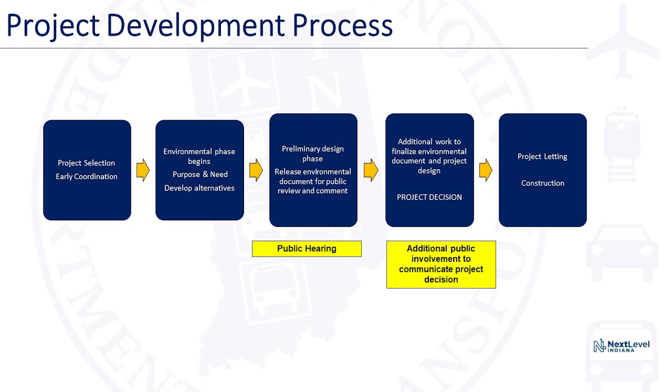This is our project development process, how it starts from the beginning. Project selection, we send out early coordination letters to stakeholders and environmental agencies. We do the environmental phase of the project, develop purpose and need and alternatives. In the preliminary design phase, the environmental document has been released for public involvement, and a hard copy of it is here tonight and also available on the INDOT website, and copies also at the Richmond Library and the Greenfield District office. So that's where we have the public hearing tonight.

Once that document has been released for public involvement, we have the hearing as we are tonight. After the hearing, we'll have 2 weeks for additional comments to come in. All those comments will be considered and evaluated. We'll roll them into the environmental document. That'll be the project decision process. And then that document will be approved by INDOT Central Office. The project will go to letting and construction.

The preferred alternative that was chosen for the project will include the construction of a new Welcome Center building with additional amenities. All this information, again, is in your handout packet that you received tonight. New lighting and decorative landscaping will be installed, and they'll have an additional restroom for the truck drivers so they don't have to go into the welcome facility main building if they don't want to.

And the sewer line connections will be tied into the town of Centerville. The reconfigured parking area will still provide the necessary and required parking spaces for trucks and passenger vehicles, as INDOT prefers as part of their comprehensive rest area truck parking plan.

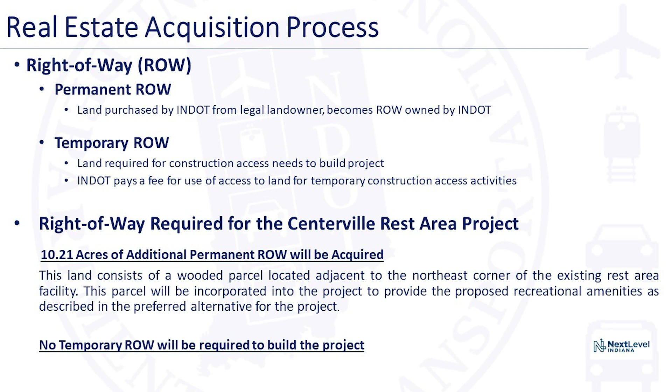Again, the right-of-way required for this project is 10.21 acres. It's the wooded parcel located adjacent to the northeast corner, and it will be incorporated into the project to provide the proposed recreational amenities as part of the project. No temporary right-of-way will be required.

The other alternative that was considered for the project was the do-nothing, no-build alternative. It's pretty straightforward as it sounds - it wouldn't require the expenditure of any state or federal funds, and there would be no environmental impacts. The alternative is feasible but not prudent because the existing conditions as described in the proposed purpose and need of the project would not be addressed. So it was determined that the do-nothing, no-build alternative would not meet the purpose and need of the project.

Can we go back to the existing layout? Okay, one more. Okay, so this is the layout of the existing rest area facility right now.

What you see is the existing ramp coming in, splitting the exit ramp from I-70 westbound, splitting the truck parking - trucks go into truck parking, cars go into the car parking area, and in the middle there's an existing building with no recreational amenities, just picnic tables on either side. All of the green hatched areas you see are existing ditches that basically become wetland.

Existing truck parking has 156 trucks being parked, and existing car parking is about 97 spaces, including 6 handicap spaces.

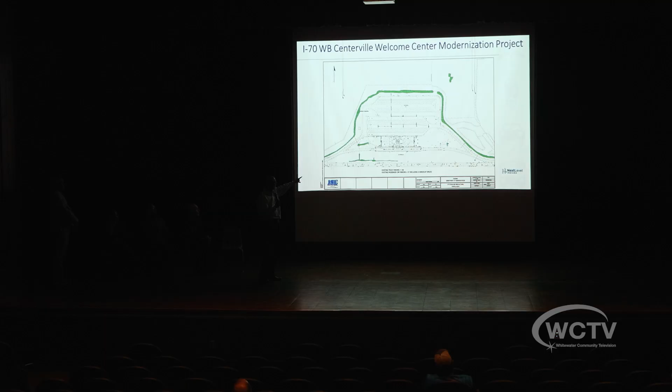What the existing parking does not provide for the truckers is that, if you look at it, at the farthest point the truckers have to walk all the way to the building to use any of the facilities there. Also, the existing layout requires truckers to go around the existing parking, go back in the back, and then turn around and come back again. Because the truckers cannot come all the way from the back - or you can't force people to - there are a lot of trash issues all around the rest area as well.

If we go to the proposed layout, next slide please. So what we're doing layout-wise: the existing ramp from I-70 at the exit remains the same, it just scooted further east.

The proposed ramp goes for the truckers, and it splits in between right here in the front. There's a new Welcome Center building with amenities that you will hear about in detail with the architects and landscaping discussions.

The car parking is right in front of the Welcome Center facility. Truck parking is in the back of the lot, which means they're not in conflict with any of the other traffic. We're using all of the existing pavement in the truck parking area.

As part of the overall project, you see the trail layout—the proposed recreational trail through the wooded areas. The only area being disturbed is a 10-foot wide trail, and the only trees being disturbed are for that trail at the existing ground elevation. There are no additional trees being removed other than for that construction, so the majority of existing trees would be maintained, providing a better recreational amenity through the woods.

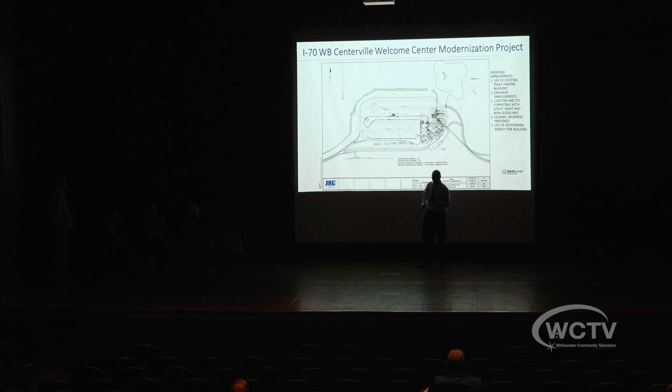As part of this project, we're also being creative and using geothermal energy for the building's heating, air conditioning, and electrical needs. The geothermal fields will be installed between the truck parking and car parking exit ramp, as well as between the car parking ramp and I-70 westbound. So there will be geothermal energy used as part of this project.

Proposed parking matches the existing truck parking at 156 spaces; we're maintaining that. Proposed car parking will be 54 spaces, which will be enough to meet INDOT's long-range welcome centers and rest area improvement needs, including 4 handicap spaces, and provides a lot more amenities than currently exist.

To go further in detail about the amenities and architectural details about how we came up with the theme for the project and landscaping, I'll pass this on to Mike.

Thanks, Imtiaz. Could you back up one slide? Yeah, to the previous one—the site plan. Right there.

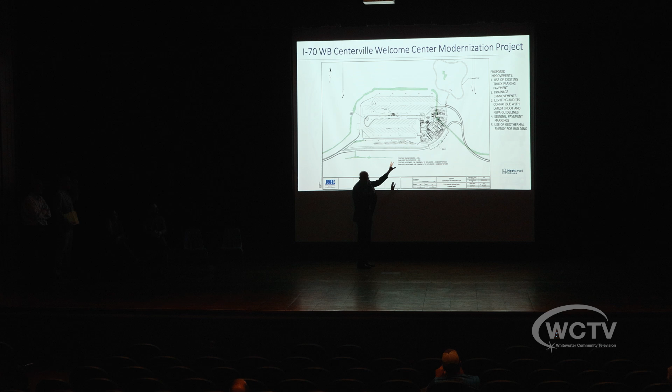Just to give you a little orientation, as Imtiaz mentioned, the new building location is in the lower right. So you'd be coming westbound on I-70, get off the ramp, and the building would be relocated to that location, facing towards the visitors.

As Mr. McAvoy mentioned, the state is building 10 of these at entrances to the state of Indiana. While the main function is the very functional and necessary truck parking, visitor parking, and restrooms, the new visitor center building gives the state an opportunity to let visitors understand what it means to be a Hoosier. Each of the 10 visitor centers has a unique theme, and after a lot of thought, the theme for this visitor center is to help visitors understand what it means to be a Hoosier through high school and Indiana basketball.

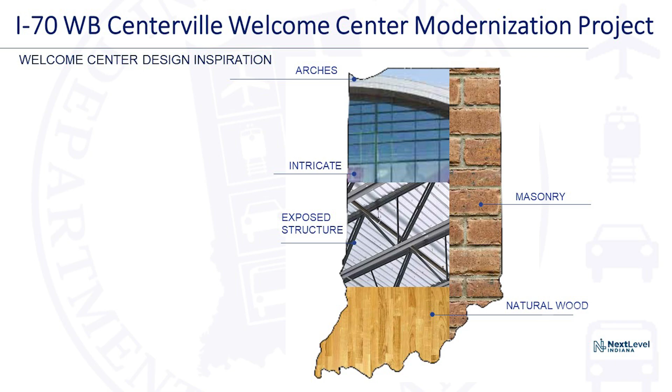So we kind of blended these ideas together to come up with the shape and the idea that as you approach the building, something striking. And these arenas, these basketball buildings, they're kind of in-your-face buildings. They're loud and they're lively, and they're intended to be something kind of bold.

So if you go to the next slide, this became the shape of the visitor center. Took the large trusses, which you saw in a lot of buildings, including many of the contemporary buildings, the glass, the transparency, and then the brick material.

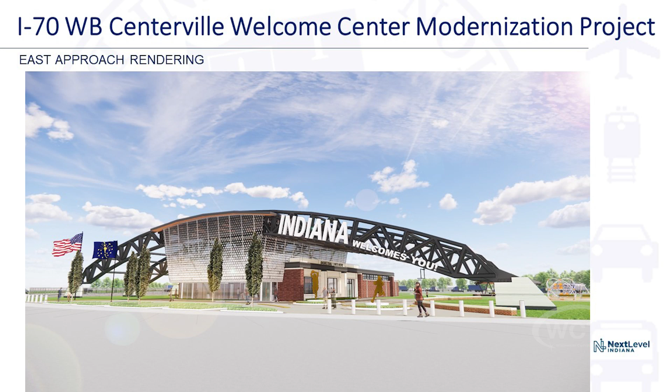Next slide. This will be kind of the view as you're coming off the ramp, the view of the building. A lot of transparency, and then it gives an opportunity to hang memorabilia inside. You might envision jerseys and banners, much like you might see inside of a historic high school gymnasium.

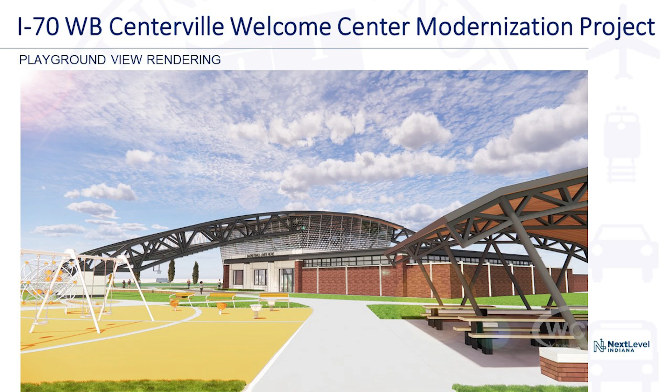Next slide. Looking at it from the backside, you can see the brick portion of the building houses a lot of the functional components, the restrooms, the storage for vending, and all of the mechanical systems. Very standard construction there. And to the right, you can see one of the picnic areas. There's a couple of areas for people that would get out and want to eat outside and take a walk around the site, as well as some of the playground areas.

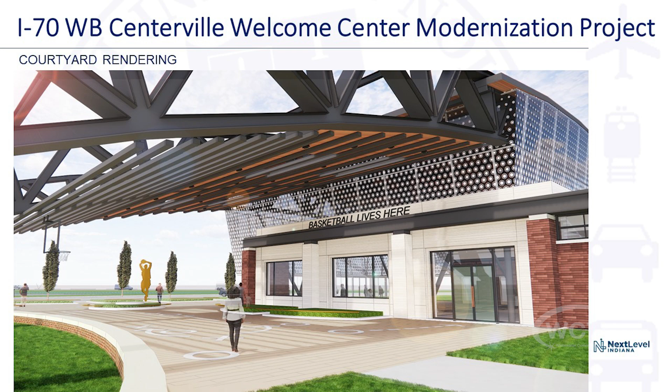Next slide. As you walk into the building, it has some covering to protect people and give you a sense of enclosure.

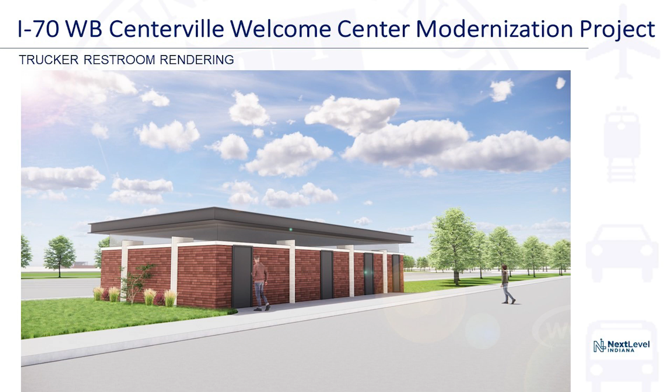Next slide. And kind of the final, this is the truckers' restrooms. And as mentioned, they're located away from the main building, but with access. Pretty standard construction, very durable materials to last a very long time.

Next slide. I think that's it. The floor plan of the building, the bottom part is facing southeast, so that's facing the off-ramp. So you'd come into the building. There's a vestibule along the south or southeast side of it. And as you come into the building, you walk across a floor that simulates a basketball floor. The flooring is a very durable terrazzo product, a lot like you see in school buildings. It can last a very long time.

And that space gives an opportunity for telling the story of Indiana basketball through memorabilia, banners on the wall. So somebody visiting would get a chance to show off a little bit in terms of what Indiana basketball really means.

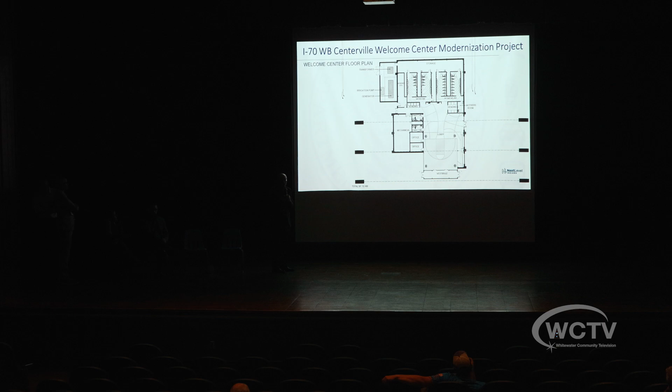Part of the reason basketball was selected was partially because on the eastern side of Indiana, in this area, there's New Castle, Richmond. The I-70 corridor has a lot of the old-time North Central Conference high school teams that built a lot of the tradition of Indiana high school basketball. And then the northern part, or northwestern part of it, you can see the restrooms and all of the service components.

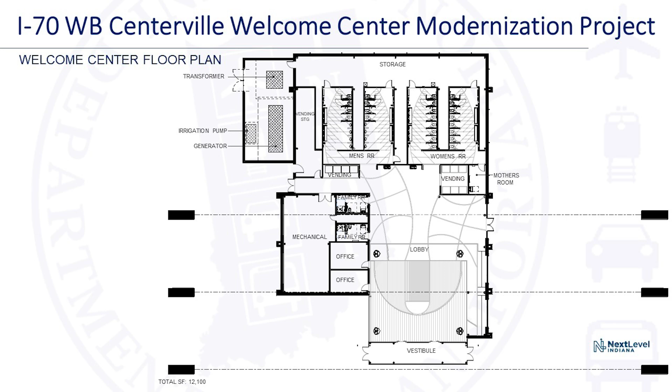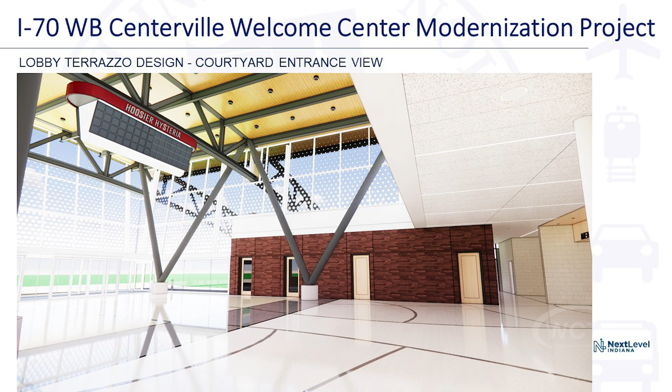And with that, I'm going to pass over to Keith to talk about some of the site amenities.

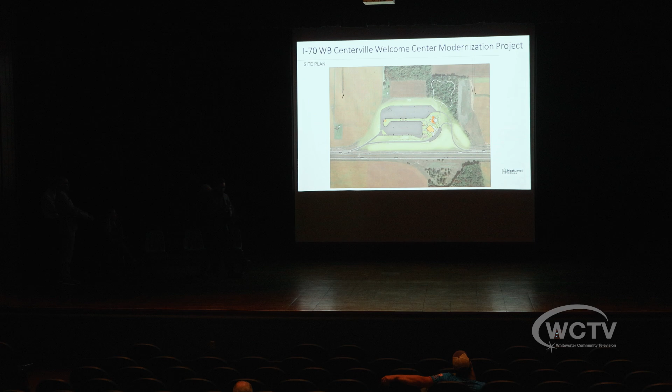Thanks, Mike. So a lot of the site amenities are complementing what's happening inside the building on the exterior. So this is just an overall site plan that we've seen previously, but in color, showing where the building welcome center will be located and some of the amenities around it. So we can go to the next slide, which zooms in more.

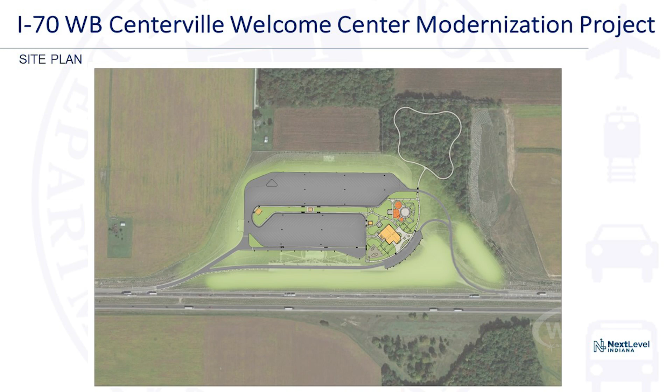As you come in, you saw from some of those renderings, there'll be a welcome plaza with two 12-foot tall sculptures of Mr. and Miss Basketball representing them. There'll be a grove of trees, a lot of soft landscaping material, places to sit and relax.

As you go into the building, there'll be a dog park in the lower corner. Up above, we have a playground where we'll have a basketball quad, like at the Children's Museum in Indianapolis, and there'll actually be basketballs out there. So if kids want to play or families want to take a break and play basketball, they can. There'll be swing sets and large play climbing structures.

There'll be adult fitness, exercise bikes, equipment. There'll be a picnic shelter, as Mike mentioned, two picnic shelters, and then the trail that goes up into the north into the woods. We'll also have lots of places for people to sit, drinking fountains, really trying to get people to get outside and engage with the outdoor activities and the amenities.

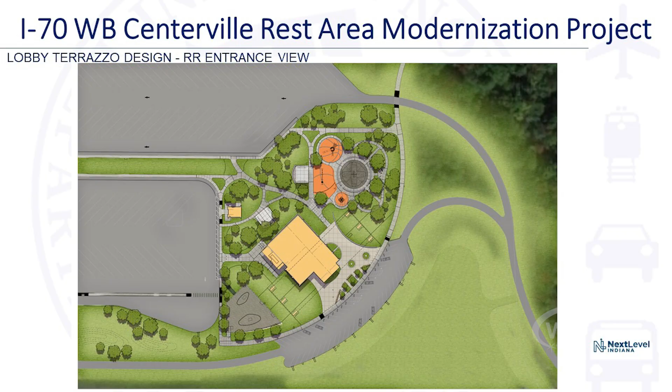And this is a massive site, so a lot of the actual landscape material that's going down will be native prairie. We're kind of restoring what was once there, adding lots of new trees, a lot of native trees. This site is really about reforesting where we can, bringing in new native meadows to bring back what used to be there with the ecology, and providing visitors a lot of amenities for the outside area. I'll pass it on now.

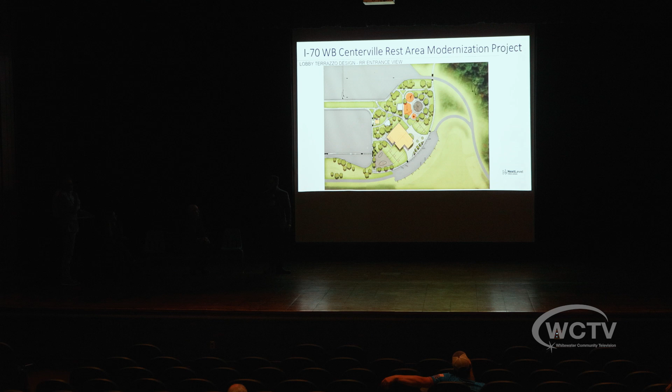Project schedule: tonight, May 16th, is the public hearing we're having right now. As part of the hearing, your information packet includes a comment form you can leave with us tonight. There are additional comment sheets out on the table that you can take home. We just ask that you send those back to us by May 31st.

Everything needs to be at least postmarked by May 31st. But you have multiple ways to comment: you can make written comments tonight, take the comment sheets home and mail them in later by May 31st, or make verbal comments tonight here at the hearing. All those comments will be given equal consideration, regardless of how you make them.

Once we get those comments in and evaluate them, the designers will take all those comments into consideration. Those will be incorporated into the draft environmental document and become part of the public record of comments and the presentation we had here tonight. The environmental document will be approved with all the public information and comments presented here tonight. The proposed construction for the project is fall 2024 to fall 2026.

So the existing ditch is a wetland, and that's it. So what you see the wetland here, right? Yeah, that's what's being disturbed as part of the project.

So we're creating a new ditch. The existing ditch is at this elevation, and that elevation, we're not changing anything. We're just putting a new ditch that's wider, bigger here. And that becomes also a wetland. So on top of mitigating the wetland someplace else, we're also creating additional wetlands for the future, and that will be more than what's being disturbed.

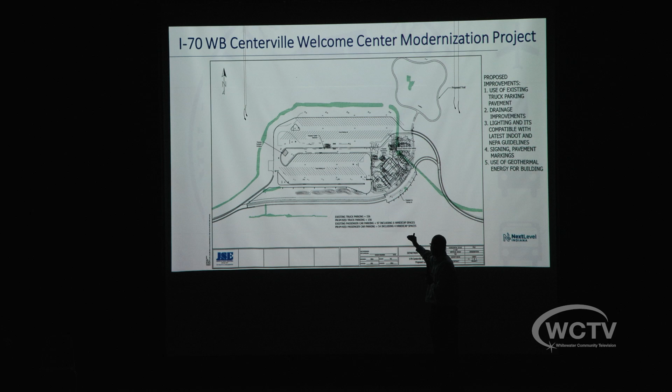Okay, and also for the tree removal for the trail, you said the trail is 10 feet wide. I would assume heavy equipment having to move all of that debris. Will they be staying all on that 10-foot path trying to get all the trees and limbs out?

Like how would they be able to stay on a 10-foot wide path that's all curvy with the heavy equipment? Okay, so heavy equipment will be used, but you realize this is just a sidewalk being constructed, right? It's a walking trail. There's no motorized vehicle allowed on that. We call it a pedestrian, recreational amenity - a 10-foot wide sidewalk, basically.

And then I also saw on the handout 3.6 acres of trees. Will you guys be planting 3.6 acres of trees to offset what you removed from the trail path? You'll see as many trees being planted, including the front as well as all around the welcome center areas, so all efforts will be made to disturb as little trees as possible.

And we have a construction limit set even for this ditch, and as many trees as possible will be preserved. Our contract requirements for construction would be to not disturb any trees outside the construction limits, and where possible, we will be able to plant trees all along.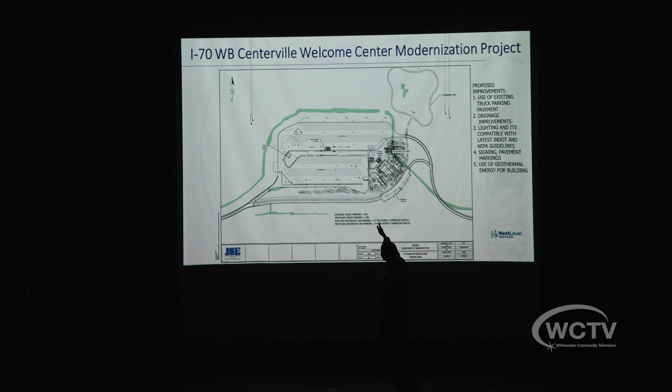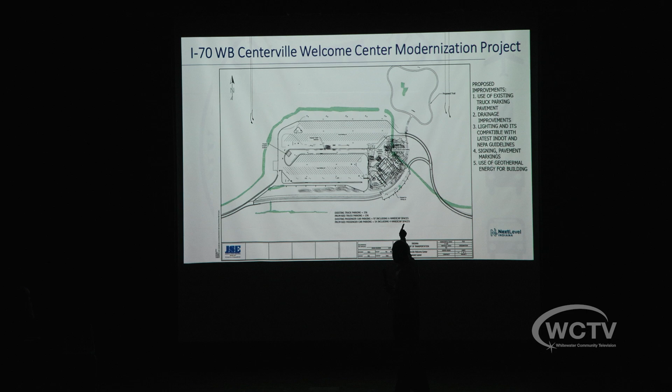So around the trail, there's not going to be a fence around the border of the trail? Like at the edge of the property? At the border of the trail? It's further out from the trail, it's still covering the fence area. Okay, yeah, we have the drawings, and I can walk you through them so you know. The right-of-way line is further out.

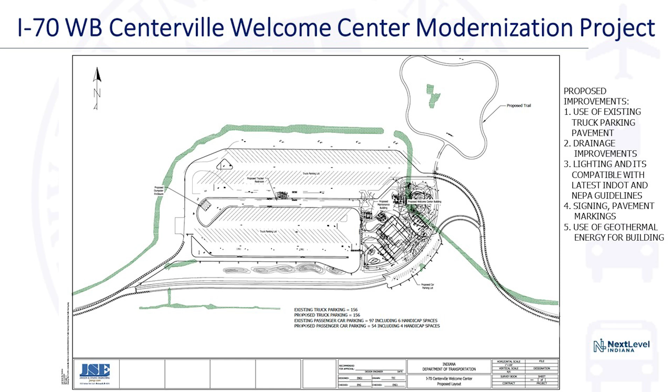Can we go one slide back? Okay, so you see that - those existing trail, right, existing fence? That's where the new fence would go, and outside of that is right by that tree line, and the trail is somewhere in the middle right there. So they would have to go through, if you're concerned about trespassing, they would have to go through the wooded area and then jump the fence for the trespassing issue. Okay.

Yeah, and then the final concern I have is my pond is spring fed from that. I don't know the exact trajectory of it, but I'm assuming that the green area that the trail goes around supplies underground my upper pond, and I use that upper pond with a ram pump to gravity feed water over 700 feet to my high tunnel, and I also use it to water my animals in the back.

Is there any contingency plan or agreement that could be met if, after construction of this project, I see a large decrease of water volume in that, which could potentially create issues with my animals? I raise sheep, a dairy cow, and chickens, and I don't have any permanent source of water back there, but I've been utilizing the natural resources that have occurred on my property and are of treasured value.

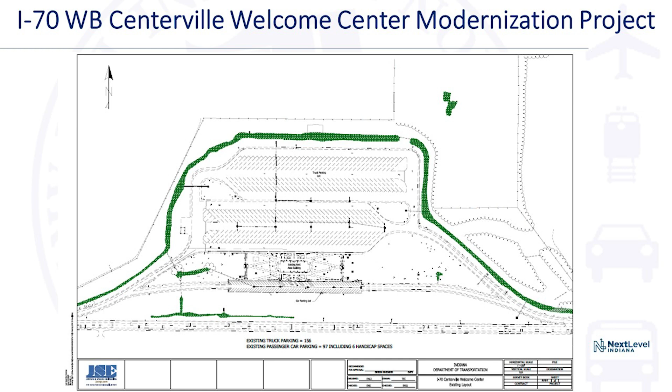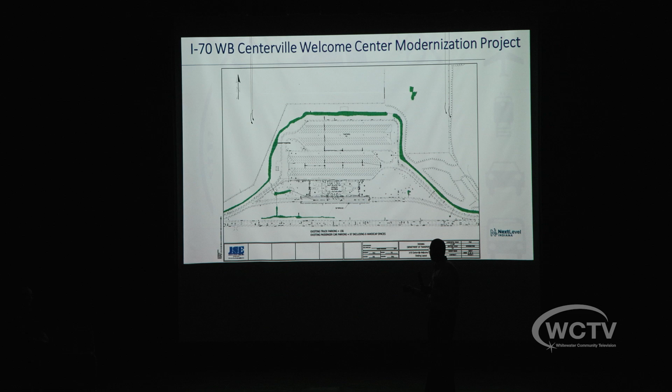So who would be the department that I would contact if after the construction of this project I notice the water decreasing, even if you guys didn't touch anything, but like an unusual level decrease? The water table can change anytime, as everybody knows, and underground water, we can't— I don't know how anybody would guarantee that. Okay, thank you.

Anyone, any other speaker we may have for today? Maybe you can hear me, or do you want me to come up there? If you'd like to come up here.

I just wondered, was there any thought to bird netting off those eating areas so you don't have birds pooping on your nice picnic benches? Hi, I'm Mindy. Quick question on the picnic area. Did you consider bird netting or anything so that when you don't have resident birds sitting and spoiling all the fun, if you get what I'm saying?

Very good question. So when we built the Kankakee Welcome Center on I-65, some of our light fixtures and structures allowed some roosting. So we understand the problem and we rectified it there. I've asked my designers to make sure we eliminate as much of that roosting potential as possible, and if we see it, we will address it during construction.

Are you guys going to have cameras out there watching the lot? No, we don't have security cameras at any rest area property across the state. We will have 24/7 property management at this facility. Right now it just has a janitorial staff, but we are transitioning at all Welcome Center properties that are reconstructed to go full property management, so there will be more people there daily.